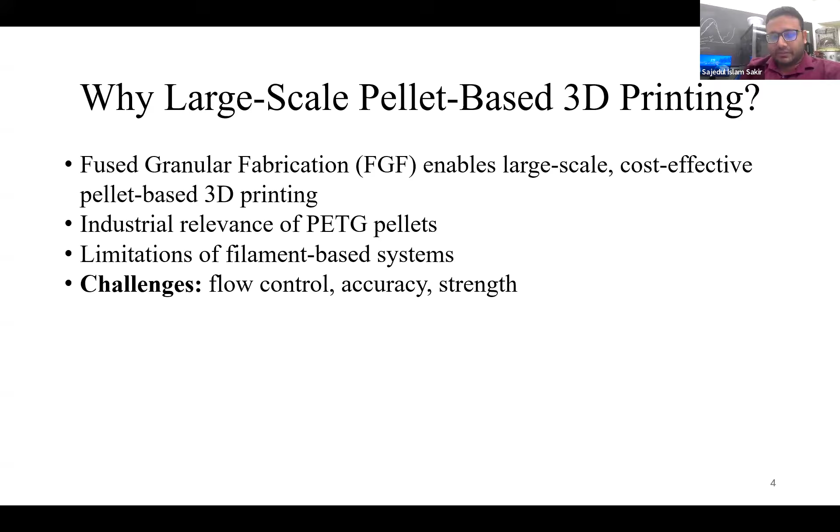So what problems am I solving in our lab right now? It's like the software-defined extrusion flow rate is not the actual material extrusion flow rate in the experiment. So I will quantify how the experimental and software-defined extrusion rate varies. Then, based on the extrusion flow rate and print speed, we have printed some parts, and I will show the geometric accuracy and how we can improve the dimensional accuracy of the parts. There is also some mechanical testing we are currently doing in our lab, so I will show some results from that too.

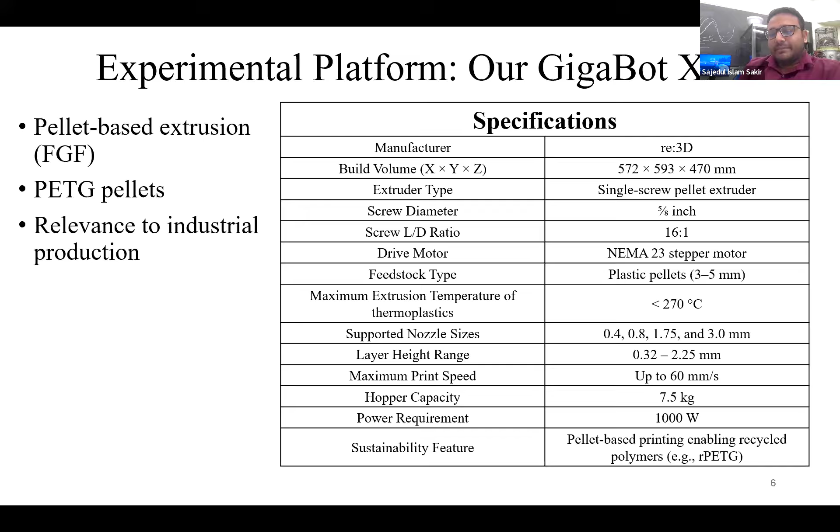And the hopper capacity is 7.5 kg, and the power requirement is 1000 watt. There are different kinds of material that can be used, like ABS, PLA, and I'm using the rPETG.

Awesome, that's awesome. So our methodology for our lab work is, first we have selected the material, then we are doing the CAD modeling.

in Fusion 360, and then we are printing the samples with the printer using different parameters like print speed settings, extrusion flow rates, and temperature settings, including different extrusion temperatures like bed temperature and other settings. Then we go through the dimensional accuracy, and based on that, I'm doing some tensile testing, and then there are some analyses going on.

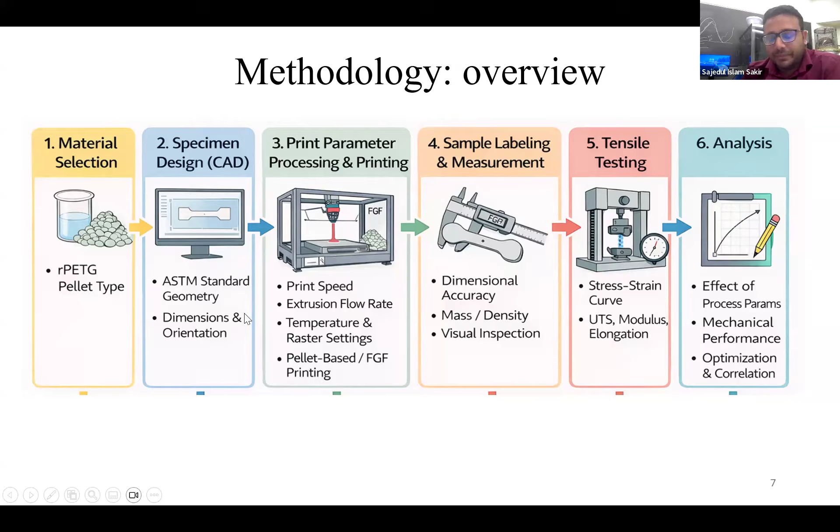And how we prepare it before printing - so we have to go through the printing preparation. So for this, we have to dry it, and we are using a vacuum oven.

The temperature setting is 65 degrees Celsius, and we are drying it for 12 hours, and the pressure is 0.67 kilopascal. On that setting, we are drying the pellets for the removal of dust and contamination, and to dry the pellet because there is some moisture content in the pellet, so we have to dry it before it goes to the hopper of the printer.

So the printing parameters we are using here: the nozzle diameter is 1.75. As shown in the specification slide of the Gigabot X2, there are different kinds of nozzle diameters like 0.4 - it's a big printer, so it has different diameters. For our lab, I'm using the 1.75 nozzle diameter, layer height 1 millimeter, and for outline, when printing, there's a skirt outline of five.

The bottom heat zone is 220 degrees Celsius, middle heat zone 210, top heat zone 200, and bed temperature is 75. For fabrication, we are printing at three print speeds: 3, 7, and 10 millimeters per second. The travel speed is 100 millimeters per second in the XY direction, and the travel speed in the Z direction is 12 millimeters per second.

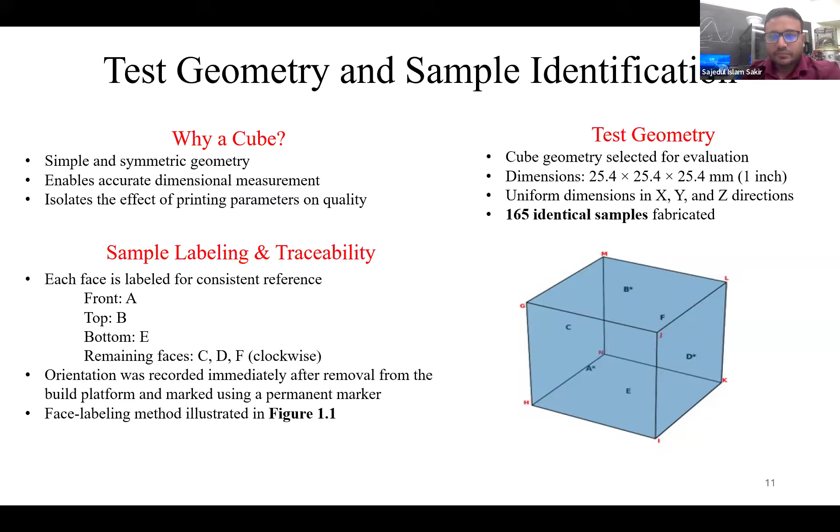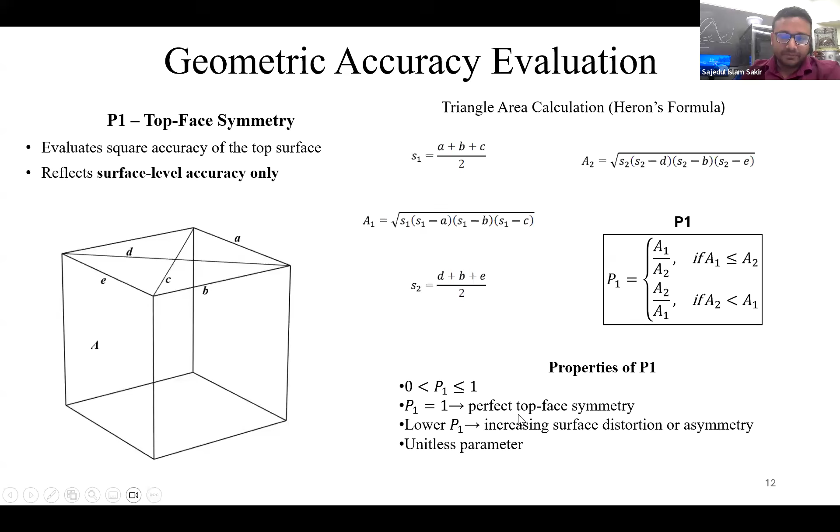Then we did some accuracy evaluation of geometry. First, the top face symmetry - when printing a cube, how symmetric are the faces. We measure it using basic geometry formulas like Heron's formula for area. We have two triangles here, one with area A1 and one with A2. P1 is the top face symmetry parameter, defined as A1 divided by A2. When A1 is higher, this formula changes. The property of P1 is that it ranges from 0 to 1. If P1 is 1, that means the face we're measuring is perfectly symmetric. If it's lower, there is some distortion and asymmetry on the surface. P1 is a unitless parameter, area by area.

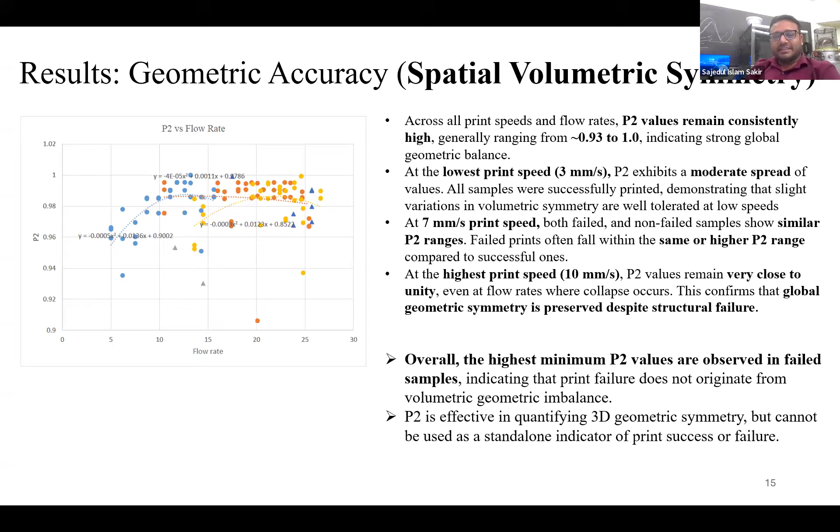Now I am going through the tensile testing, what I am currently doing. I have chosen, so our lab has chosen, the ASTM D638 Type 3 as the standard. Printer nozzle diameter is high, so we have to use this Type 3 sample.

What we will do now, we are actually doing it, I'm doing it now. I'm doing some tensile testing of the samples I have printed, and this is the CAD model of the Type 3. The width and thickness, it is basically 57 millimeters length, this gauge length, and we are using width 19, like we have modified the sample.

If we use the standard ASTM D638 dimensions, they are less, but we modified it because our printer diameter is much higher. If we use the standard dimensions, the shape we got from printing is not accurate, it's too thin for tensile testing, and it even breaks when printing. So we modified the sample length and thickness to 10 millimeters, and also changed the overall length for tensile strength measurement.

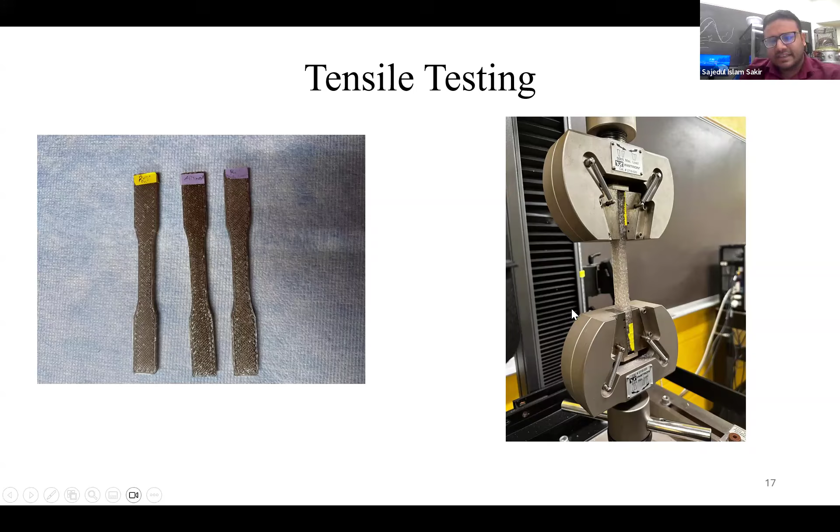So I'm showing what I'm doing now. These are the samples I have printed from these modified settings. I'm doing the tensile testing currently. This is the results when doing tensile strength for printing speed 7 millimeters per second. I printed 3 samples, then doing load versus elongation curves. I'm doing the current analysis, it's still ongoing, not finished. I just wanted to show what I'm doing in the lab right now.

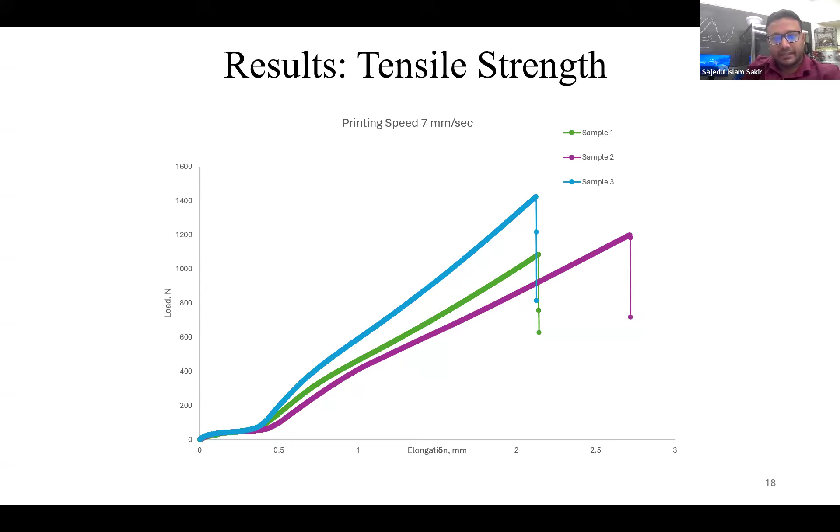From this presentation, the discussion part is like software extrusion settings are insufficient. We have measured the experimental flow rate and software extrusion flow rate. It's almost 90% to 95% range.

Although there were some mismatches when I first started, there was so much difference, like 50%. From the experiment I got some 50% result, but now after modifying the settings and everything, it's showing 80% to 90%. But when I started, I faced lots of difficulties, and there was so much mismatch between the software defined and actual extrusion flow rates.

And then we do the density-based measurement to improve the accuracy, like how it works. Based on the results from the lab, it shows that there's an optimized relationship between print speed and the accuracy of the dimensions of the print, as well as the strength.

Strength is what I'm doing now in the tensile testing. Flow rate and speed coupling is very critical in this printing, and infill density also significantly affects the tensile strength behavior.

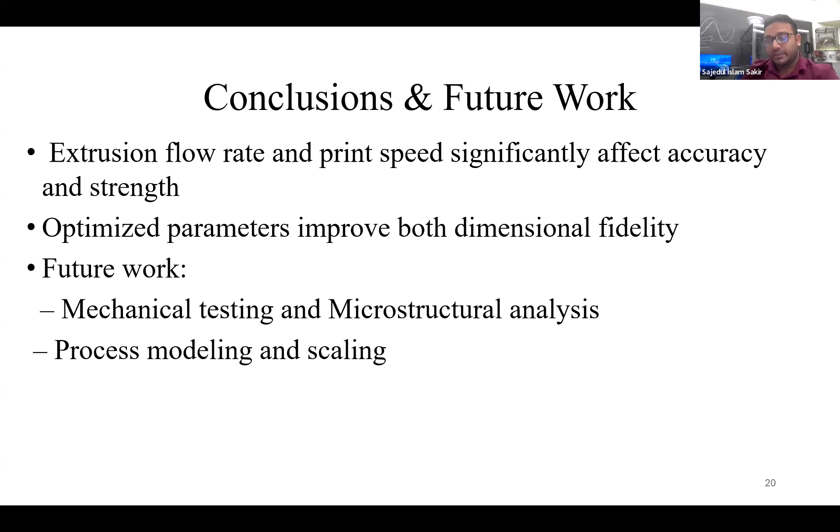What I am currently working on, I don't show how it works here because it is still ongoing. Future work includes: extrusion flow rate and print speed significantly affect the accuracy and strength of the print samples. Optimization is required for dimensional fidelity and tensile strength. Future work includes mechanical testing and microstructure analysis.

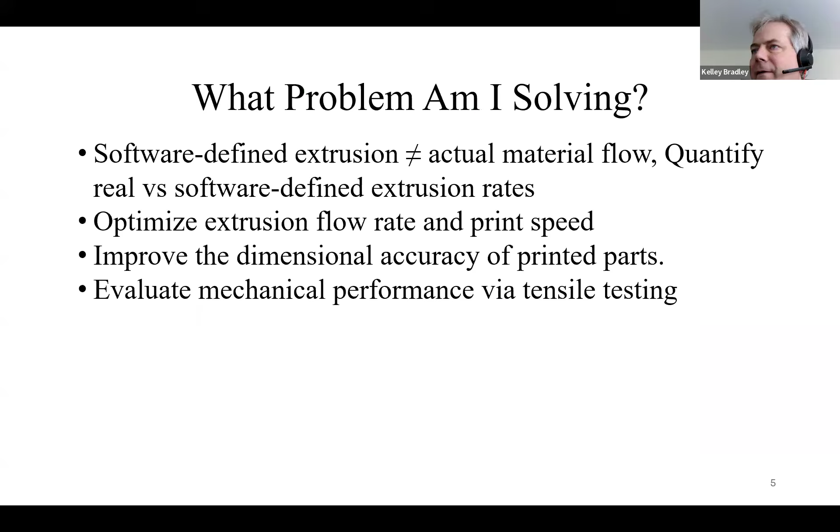So looking at the chat, I believe the question about the decimeter units came from your density measurements, given on the second or third slide. I believe it was kilograms per decimeter cubed. Yeah, the PETG properties, decimeter cubed, yes. The density - yeah, it is actually the properties. Here I missed it. The kg per decimeter cube. Yeah, I said meter cube.

Okay, and Sajedul, these are specifications - did you actually measure these properties, or are these specifications? It is the specification, I didn't measure it. Yeah, it's from the samples - they have the chart, so I just copied it here. And you can see on the bag where we purchased the samples from, for traceability.

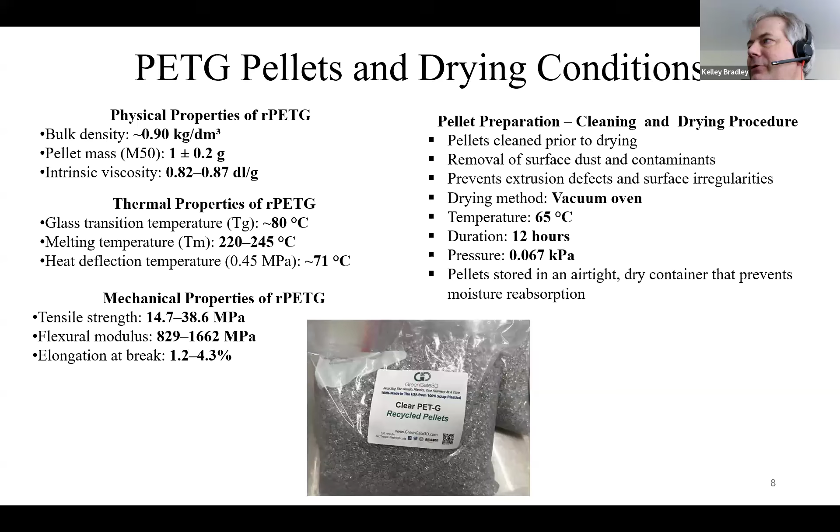So let me say a few things that may help address some of the other comments in the chat. Sajedul is really presenting work over two master's theses. Some of the work was with another student who I was hoping could join us, but he wasn't able to make it - Momin Jordan, who did a great job, just like Sajedul has done.

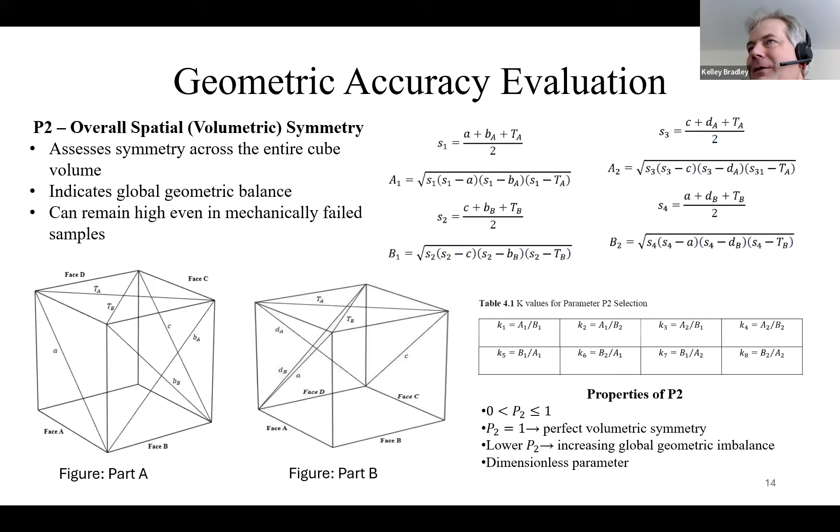What we found initially is that we were having a great deal of trouble getting dimensional accuracy with our prints. Originally we were looking at a test object to print, kind of like - oh, I forget the name - you guys will know, the little tugboat that's the classic challenge print item. We looked at various complicated structures, but in the end we realized we had such a challenge that we needed to go to the most basic structure, a cube, and get parameters that would print it with good dimensional accuracy. Then once we got there, we tried to optimize those parameters.

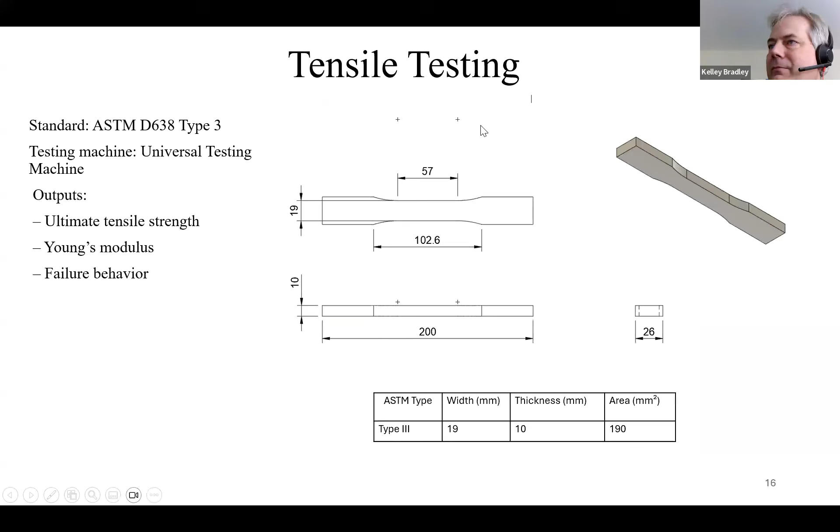So, Sajedul, could you go to the slide for the P1 graph of the P1 parameters versus the print? Yeah, that's fine, either one of them.

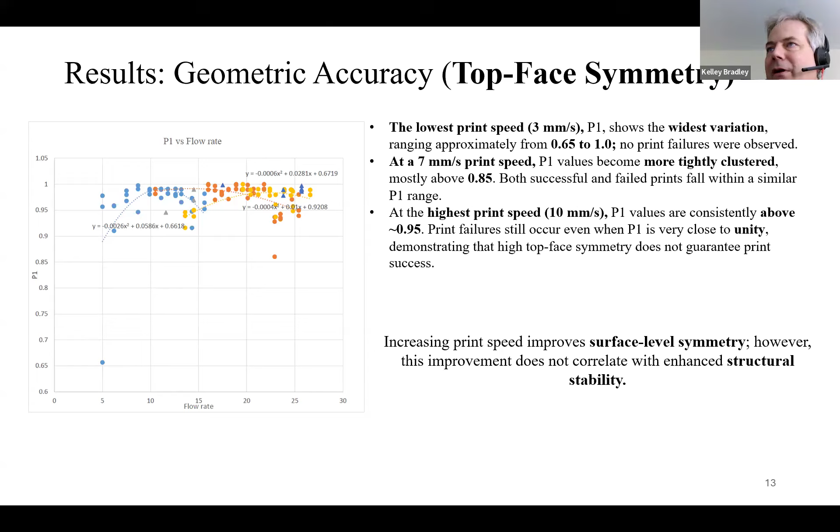Now, one thing I'll ask Sajedul to talk about, because he understands this much better than I do, is that you can't really dial in the flow rate directly, at least not in the configuration we have. We kind of have to get to it in a roundabout way. Sajedul, could you explain how, if you want a specific flow rate, how you get that? Is it a factor?

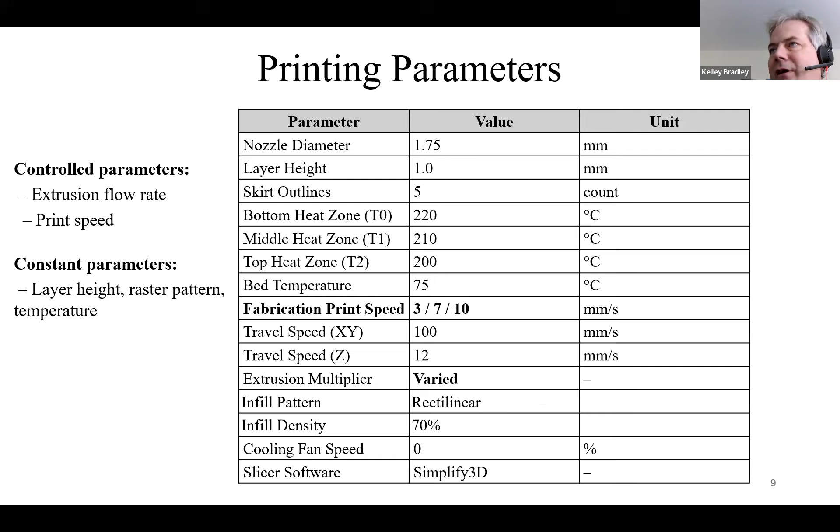If you go to the previous slide where you have the print parameters, over here you have the extrusion multiplier. I think that extrusion multiplier is actually how you translate it into the printer, right?

Yeah, so when I was doing the work on flow rate calculation, I tried different extrusion multipliers, 1, 1.2. So based on that, when I was printing at 1, I got some results in my experimental sample, like timing, like I showed in the theoretical calculation. It was much more like 50% of the actual Simplify3D flow calculation. But then I tried to fix it at 1, and when I give it 1, the extrusion would come to 2.1 on the software. Based on this I found these calculations, measuring timing and everything. I have 3 or 4 samples on this, and they are 90 to 95% accurate. It's just one calculation that I'm showing here.

So my understanding is the extrusion multiplier: if we fix it at 1, then the printing flow rate is more accurate. But when we manually change or vary it, then it's a little bit different. I don't get that. That's why I'm using the 2.1 millimeter extrusion width, which actually comes when I give the extrusion multiplier 1.

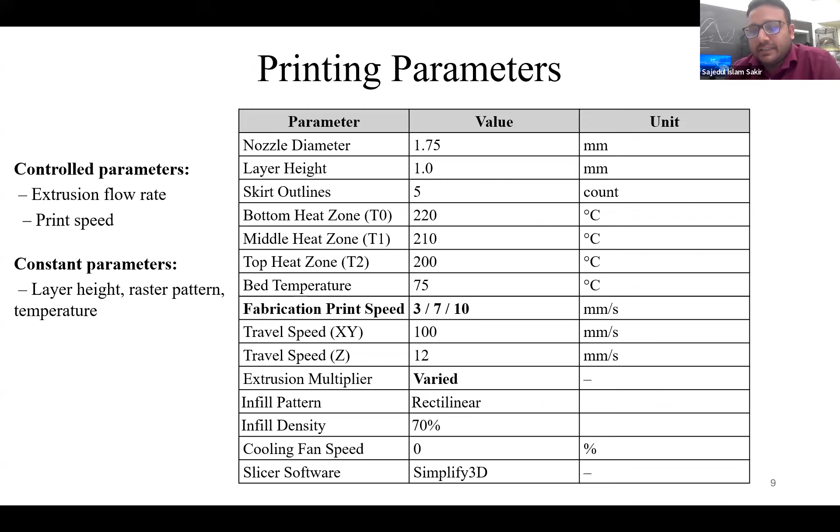So this is actually with extrusion multiplier set to 1. But if I vary it, then the percentage difference is like 50%, 60%. We also have that data in my book. That's why I'm trying to do the printing with extrusion multiplier set to 1, although we can vary it in Simplify3D.

Those were the comments I wanted to share, and I'll turn it back over to Sajedul if there are any other questions.